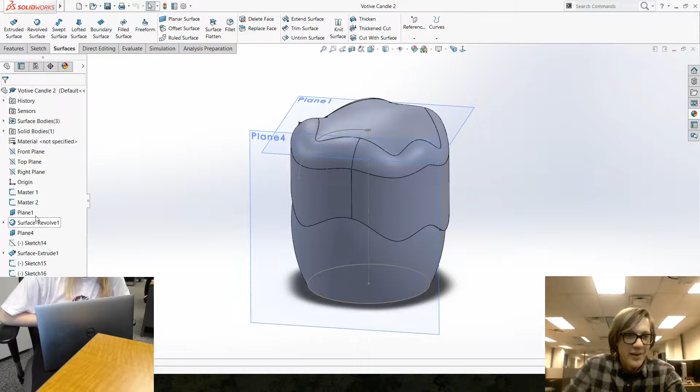Okay, so we're building frosting onto a donut thing. So I'm guessing, yeah, okay. Let's try it this way. I'm going to do an offset surface of that. Sure, 0.1 inches, that's fine.

Then on the front plane, I'll sketch some frosting looking stuff. And then I might have to play around with that a little bit.

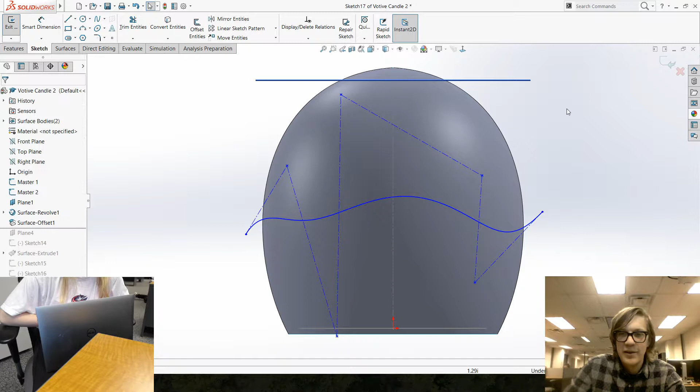Then I'm going to go to surfaces and trim the surface with my sketch. So I got to pick standard, make sure my sketch is picked, and then I can either keep things, like I want to keep this one, or I can remove other stuff, right?

Yeah, that definitely works a lot better. I'm not saying it's the only way to do it, but that's certainly one way you could do this.

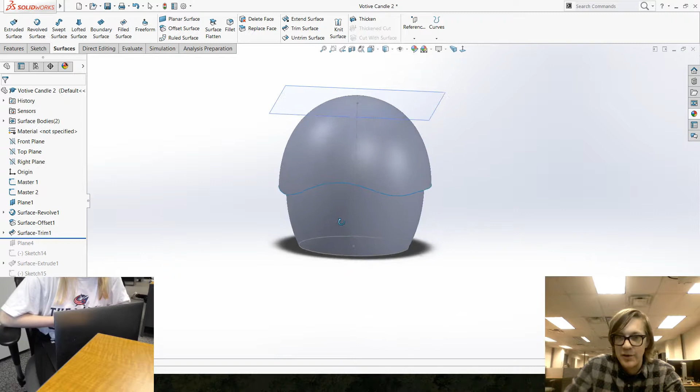The next thing is going to be, well, how do you connect these things together? Because right now I have a surface and another surface.

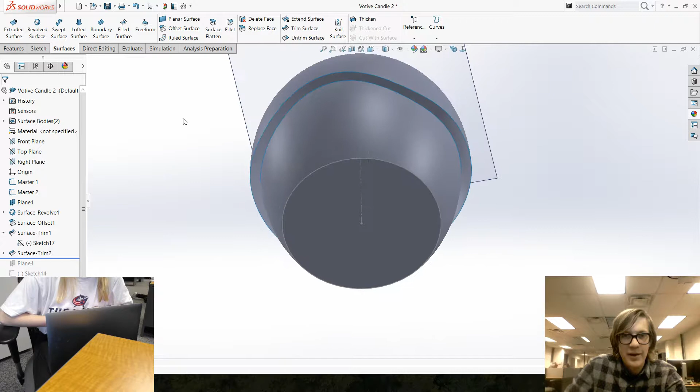I can use that same sketch to trim this other, like the inside surface, and I want to keep the bottom, and then I should be able to actually loft these two things together, and now they're all connected. Now I have a frosting covered donut thing, and then on top of this you could put your sprinkles, and now it's like the best of both worlds.

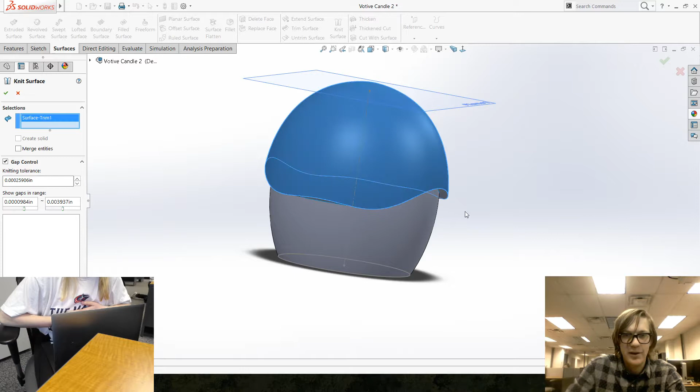I think it should eventually... I usually don't fillet until I make it a solid again, so eventually combine all this stuff together, knit them. If it didn't...

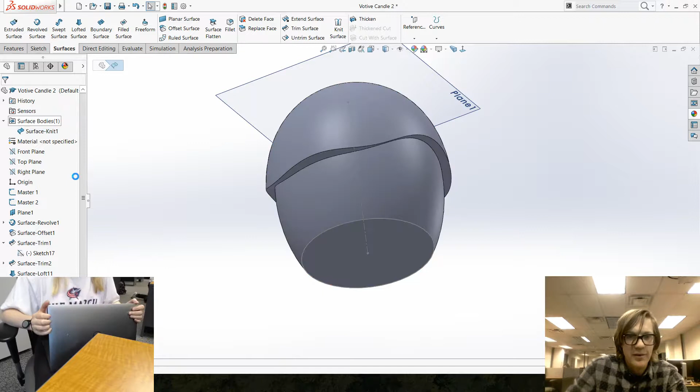Hold on a second, it's still a surface body. I don't know if there's a bottom. Oh, is there not a bottom? I don't think I added a bottom. Or maybe I did. No, I take it back. Let me go back into that. Why won't it let me...

Alright, you know what? Ignore it for now. I kind of wanted to see... Yeah, there we go, that helps. Anyway, I think that's another way you could do the...

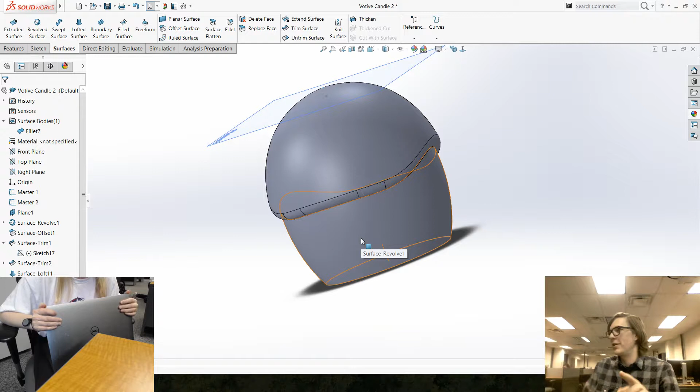And you're kind of using what you already had built, that inner surface, offsetting something and then trimming it, which is a really good way to build on something you already have.

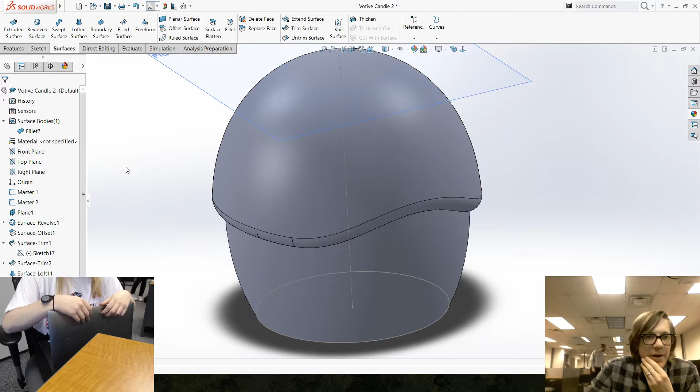And then going about making the sprinkles, how would I do those? What do you think would be best? Yeah, I don't know. It might be easiest to just sketch a sprinkly looking thing. So like...

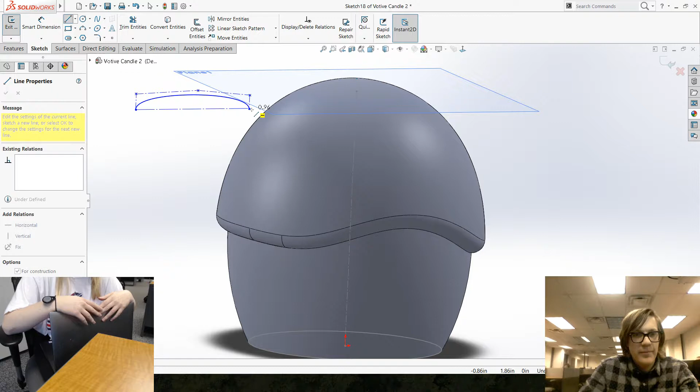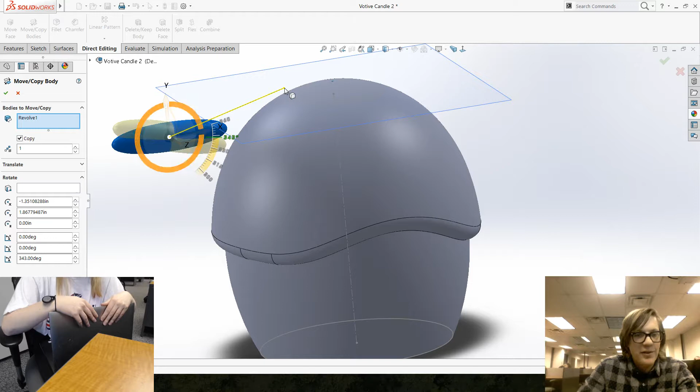And then go in here to move and copy bodies. Like where do you want to move that? I'm gonna move it over here. And I don't think it lets you—yeah, Solidworks is stupid, it won't let you rotate and move at the same time. So you have to rotate it and then go in and move it so that it's close, and say okay. Oh, okay.

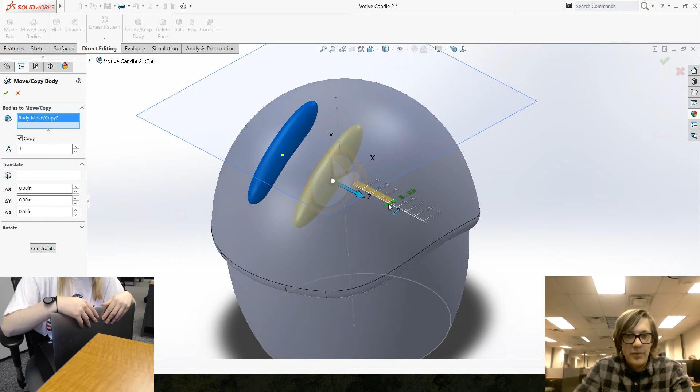Yeah, I would just do that a bunch of times. When you do this move copy thing, if copy box is checked, it will do your move and also copy it. And that can be frustrating because if you're moving things and that box is accidentally checked, you have copies of everything. You're like, why do I have so many copies? It would also be good if I didn't have to make the sprinkle a million times. Exactly, so that's what I would do.

Oh, yeah, okay, yeah.